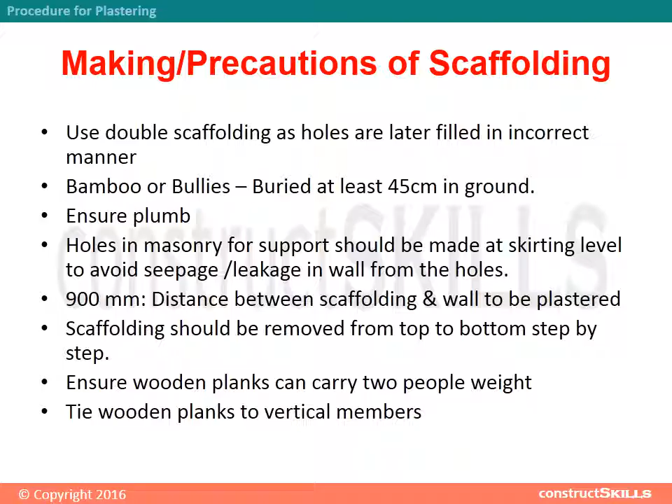Ensure holes in masonry for support are made at skirting level to avoid seepage/leakage in the wall from the holes. Keep a minimum 900 mm distance between scaffolding and the wall to be plastered, for sufficient working space. Scaffolding should be removed from top to bottom step by step. Ensure wooden planks are strong enough to carry two people's weight and are tied to vertical members.

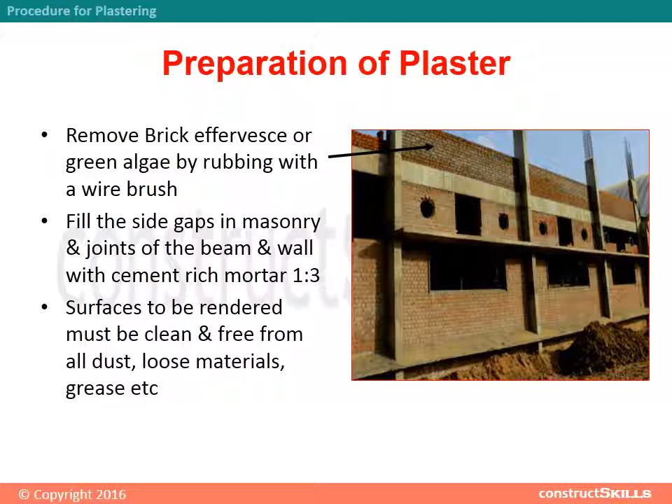Preparation of plaster. Remove brick efflorescence or green algae by rubbing with a wire brush. Fill the side gaps in masonry and joints of the beam and wall with cement-rich mortar 1:3. Surfaces to be rendered must be clean and free from all dust, loose materials, grease etc. All joints in the masonry should be raked out to a depth of at least 12 mm.

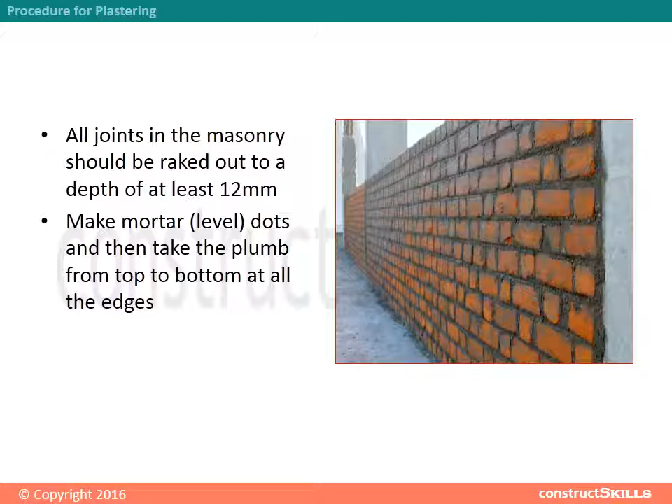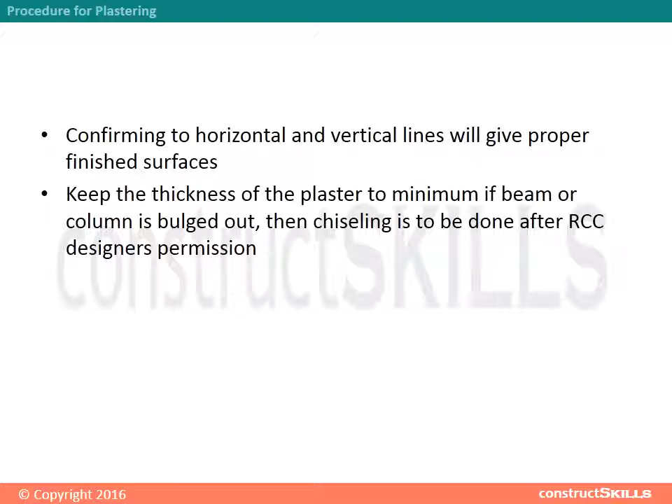Make mortar level dots and then take the plumb from top to bottom at all the edges. Conforming to horizontal and vertical lines will give properly finished surfaces. Keep the thickness of the plaster to a minimum; if a beam or column is bulged out, then chiseling is to be done after the RCC designer's permission. Fix chicken mesh at all the RCC junctions.

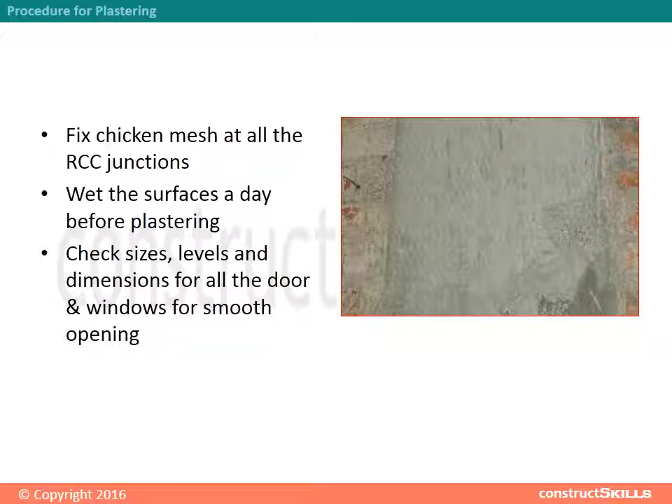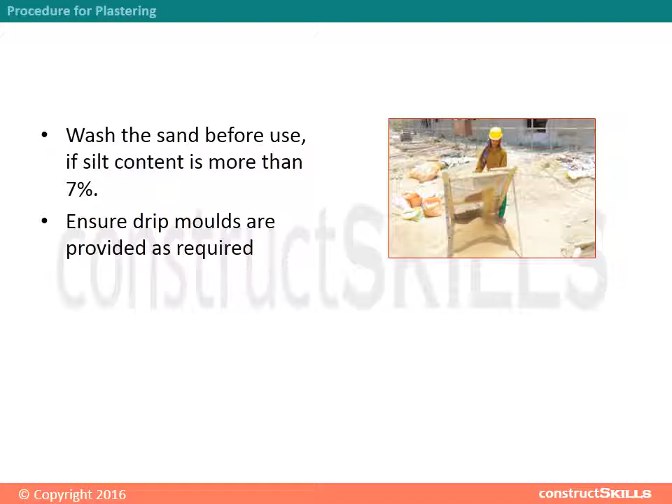Wet the surfaces a day before plastering. Check sizes, levels and dimensions for all the doors and windows for smooth opening. Ensure proper hacking of plaster surfaces. Wash the sand before use if silt content is more than 7%. Ensure drip moulds are provided as required.

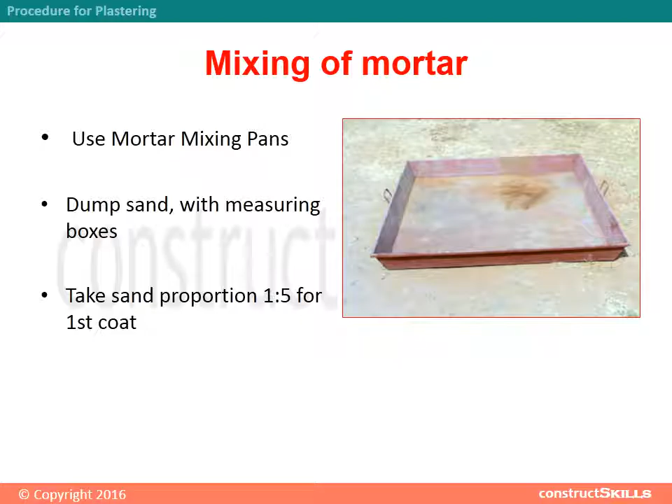Mixing of mortar. Use mortar mixing pans. Dump sand with measuring boxes. Take proportion 1:5 for the first coat. Mix the heap of sand and cement, pour sufficient water to get the required consistency of mortar.

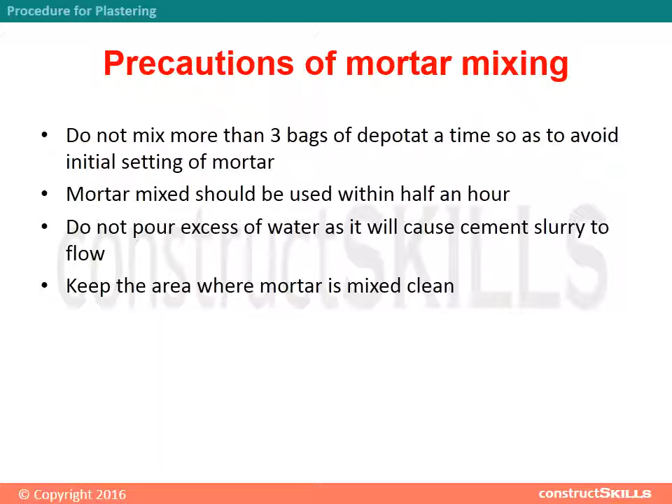Precautions of mortar mixing. Do not mix more than 3 bags of cement at a time, so as to avoid initial setting of mortar. Mortar mixed should be used within half an hour. Do not pour excess water, as it will cause cement slurry to flow. Keep the area where mortar is mixed clean.

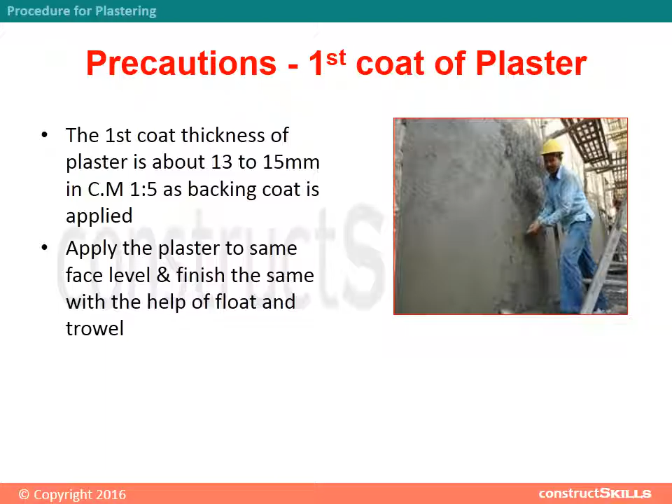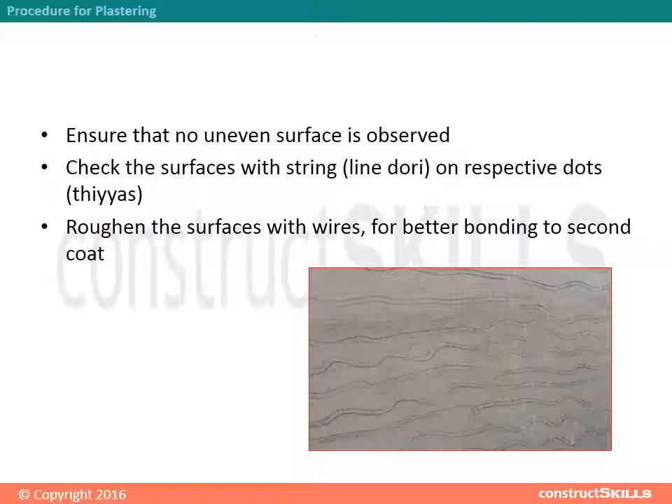Precautions. First coat of plaster. The first coat thickness of plaster is about 13 to 15 mm in cement mortar 1:5 as backing coat is applied. Apply the plaster to the same face level and finish it with the help of float and trowel. Ensure that no uneven surface is observed. Check the surfaces with string line on respective dots. Roughen the surfaces with wires for better bonding to the second coat.

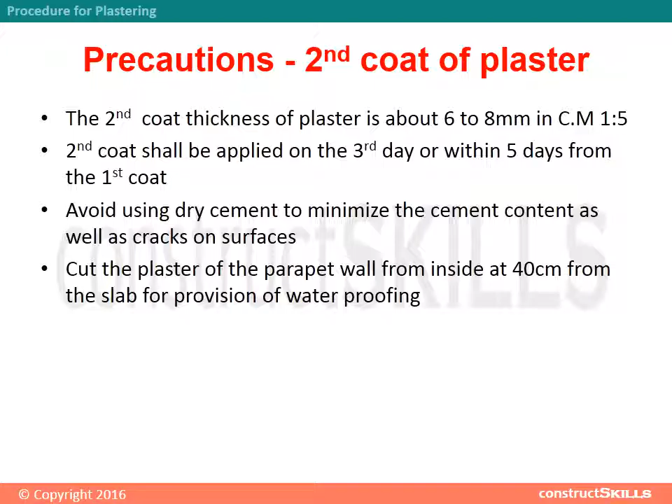Precautions. Second coat of plaster. The second coat thickness of plaster is about 6 to 8 mm in cement mortar 1:5. The second coat shall be applied on the 3rd day or within 5 days from the first coat. Avoid using dry cement to minimize the cement content as well as cracks on surfaces. Cut the plaster of the parapet wall from inside at 40 cm from the slab for provision of waterproofing.

Curing shall be carried out for a minimum of 15 days. Curing of plaster shall be done from top to bottom for dead walls, and from individual floor for other walls where openings and chajjas are provided. The second coat shall be finished smooth in texture, even finish, uniform in line and plumb.